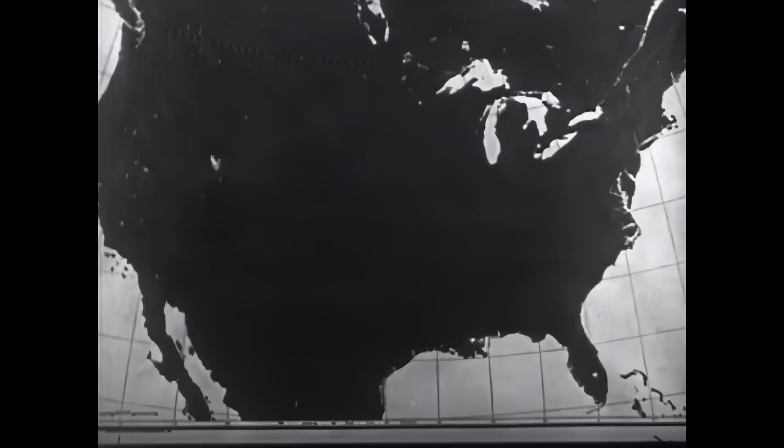Lockheed over North America: United Airlines, Continental Airlines Incorporated, Mid-Continent Airlines Incorporated, Northwest Airlines, Chicago and Southern Airlines, Braniff Airways Incorporated, National Airlines, Delta Airlines, Boston Maine Airways Incorporated, Trans-Canada Airlines, Pacific Alaska Airways. Lockheed over Central America: Líneas Aéreas Mineras, TACA, Compañía Nacional Cubana de Aviación. Lockheed over South America: Pan American Airways Incorporated.

KLM, Air France, Avianca, Línea Aeropostal Venezolana. Lockheed over Africa: Air France, Air Afrique, Aéro Maritime, South African Airways, DETA.

Lockheed over Europe: British Airways Limited, Aer Lingus Teoranta, KLM, LOT, Aeroput, LARES Romania, Air France. Lockheed over Asia: KLM, KNILM, Japan Air Transport Company Limited.

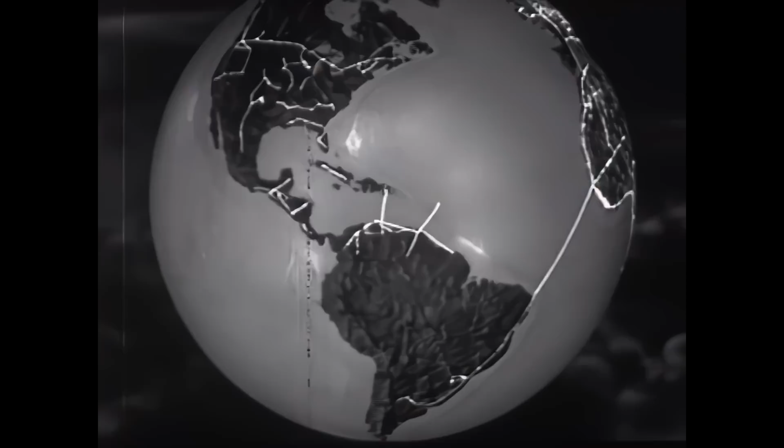Worldwide coverage, but it has not been accomplished in a day. It is the result of a smooth-running combination of men and machines. In that combination lies the story of Lockheed itself. It is a success story, modern, exciting, typically American.

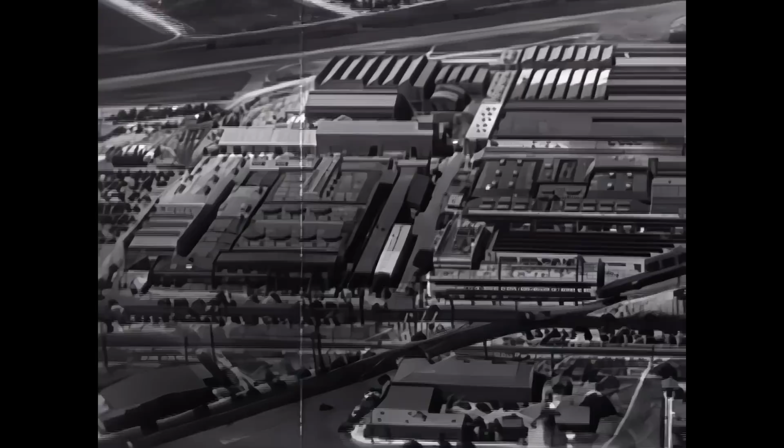The Lockheed Aircraft Corporation plant, Burbank, California, in 1926. And today, the same company, the same location, but quite definitely not the same plant.

As recently as 1932, sales aggregated the overwhelming total of $23,298.03. In 1940, actual deliveries amounted to more than $42 million, and conservative estimates indicate that in 1941 this figure will be more than doubled.

And to the men of Lockheed belongs a large share of the credit, to their skill and to their loyalty. They are a cross-section of typical American workmen: drillers, riveters, tool makers, die casters, machinists, and technicians.

In 1931, there were only 300 of them. In 1941, over 35,000. Every man who checks in, from office boy on up, has taken and passed exhaustive tests covering intelligence, temperament, and special aptitude to prove his individual ability.

35,000 American workmen, the right men for the right jobs to build the best planes. This is not a trick shot made with mirrors. It is the drafting room of the engineering department where every new Lockheed has its beginning.

A beginning conceived with the purpose of supplying the answer to definite needs of the aviation industry. To attain this goal, over 850 engineers make over 5,000 drawing plans, devoting a total of over 200,000 work hours to their mission of creating one new design.

The component parts of a modern airplane's wing, fuselage, and tail surface are almost countless in number, yet every single one of them must be engineered. Even the most minute part receives the greatest attention. Four separate drawings are made showing detail from four different angles. Although the part is no larger than a silver dollar, it will have to go a great deal further.

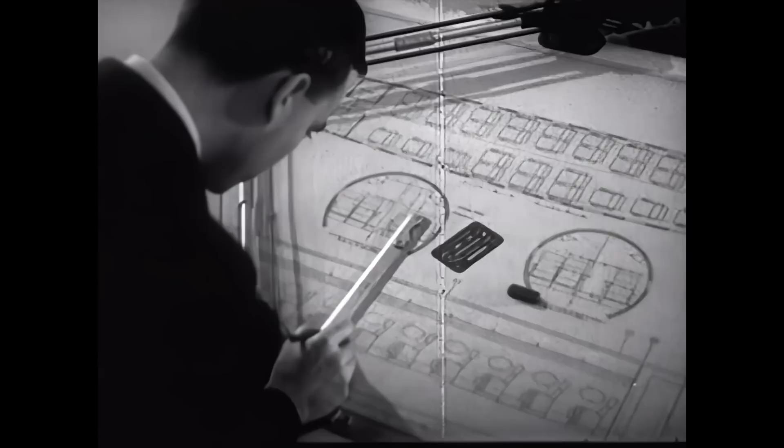The interior of a plane is one feature of design seldom associated in one's mind as coming under the supervision of the engineer. Yet one of his most important jobs is to provide utter comfort for passengers traveling through the air at high speeds. The Lodestar's cabin has been designed for this comfort.

Inside, the sound of powerful motors is reduced to a pleasant hum by scientific soundproofing and vibration control. Restful chairs, ample space, and headroom are results of thoughtful planning, and all Lockheeds are especially adaptable to the requirements of private owners. For businessmen to whom time means money, the Lodestar is convertible into a convenient and dependable office in the sky. The compact 12 becomes a comfortable lounge for attending important events anywhere at any time.

The cabin of Lockheed's new four-motor transport, the Excalibur, will look very much like this. Although the plane is still under construction, the engineers have built an exact replica, known as a mock-up, out of wood. In this way, every possible detail of passenger comfort can be effectively predetermined and applied.

But the ideas and plans that this man and the hundreds like him put into execution are not only those of Lockheed's chief engineers, but those of the entire flying world. For the Market Research Division maintains close contact with the operative branch of the industry. The staff compiles lists of important features relating to a plane's design.

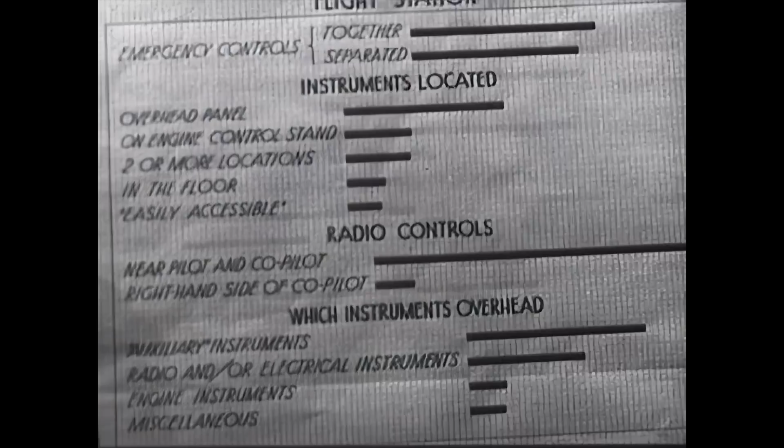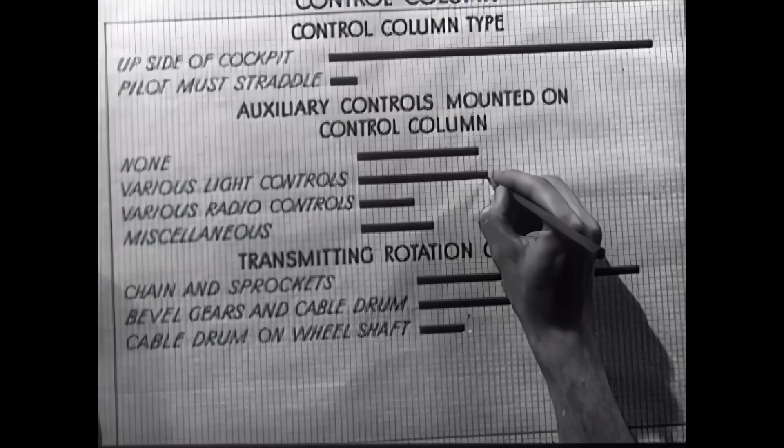Detailed graphs and charts are compiled by competent statisticians. No suggestion is too small. Every answer to every question is checked and noted. These findings are recorded in another pamphlet. You told us this is the way you would do it.

On flight station, on engine control stand, and on rudder pedals, we asked: are brake toe pedals desirable? 93% said yes, 7% no. That verdict is submitted by men whose combined opinions represent the experience of over 16 million hours of flying.

These practical viewpoints, as gathered by market research, are submitted to the engineers. They combine these ideas together with their own creative ability in the conception and building of every new Lockheed plane. That's how Lockheed designs airplanes to suit the men who know airplanes best: operators, pilots, and regular airline passengers.

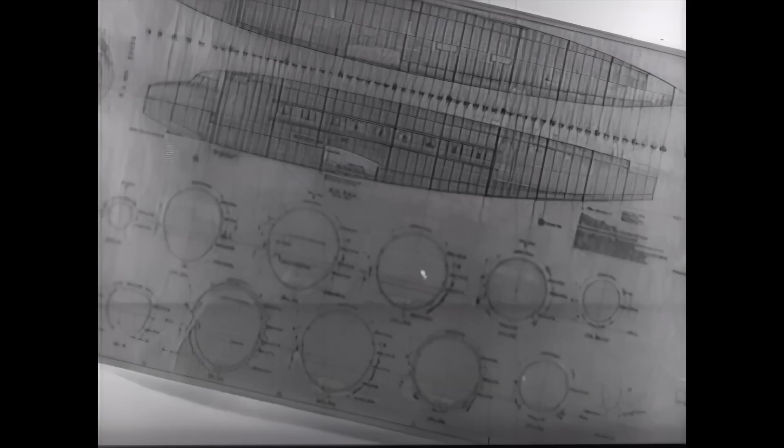And the first form a new plane takes is on paper. From these drawings, and thousands like them, an exact scale model known as a wind tunnel model is made and connected to instruments which determine its flight characteristics. The model is hand-carved, accurate to the fraction of an inch, weighs over 500 pounds, and costs more than $5,000 to build.

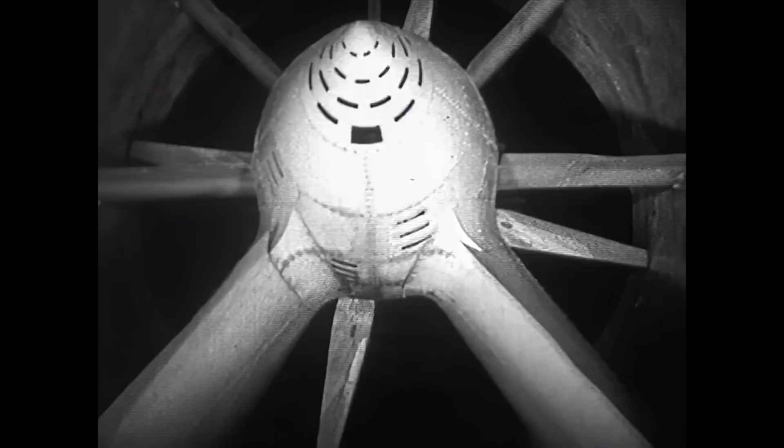The door is closed, the wind tunnel sealed. A flip of the switch and the wind propeller whips up to speed. The model is exposed to a far higher velocity than this 90-mile-an-hour wind. The small wind tunnel model is actually subjected to and withstands a much greater force.

From an idea to an actuality, from theory to fact, from a model to a completed Lockheed, the plane has been built. More than that, into it has been built the strength, ruggedness, and durability necessary for its safety and high-speed performance. But not so long ago, this shining plane was only a small part of a trainload of metal addressed to Lockheed.

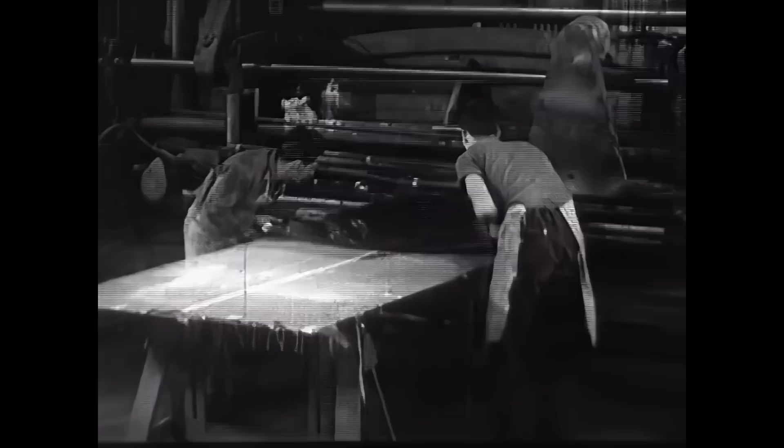For the metal inside these wooden frames is the stuff that planes are made of. Hard and strong, it must be fabricated by men and machines into the parts that make airliners. Giant shears act as huge mechanical scissors. Metal sheets are slipped into place. The sharp blade strikes and cuts through them as if they were cloth.

The high-frequency router, a dental patient's nightmare, turns 15,000 revolutions a minute and cuts layers of metal into their first rough shape. The bit turns so fast that it must be cooled by a constant stream of oil.

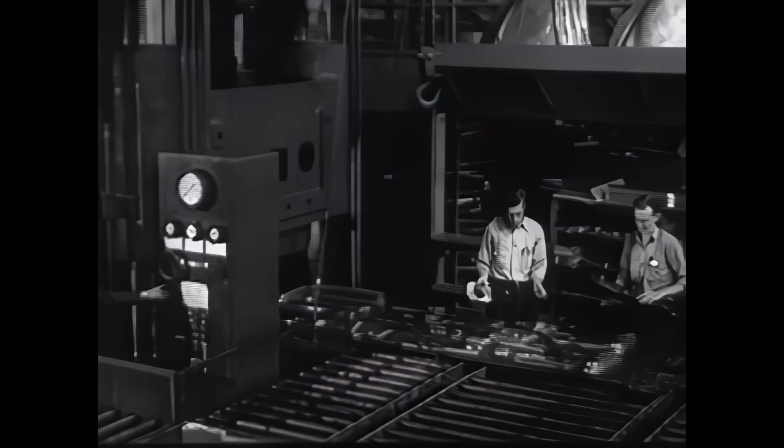The massive hydro press exerts an overall pressure of 9 million pounds, and it literally squeezes parts out of metal. An endless chain of roller conveyors carries a tray with the forms to workmen. They put the metal, which has already been cut to the correct size, in place on the forms. The tray now continues on its way into position under the press. The operator touches a switch, the press starts down, and look out below.

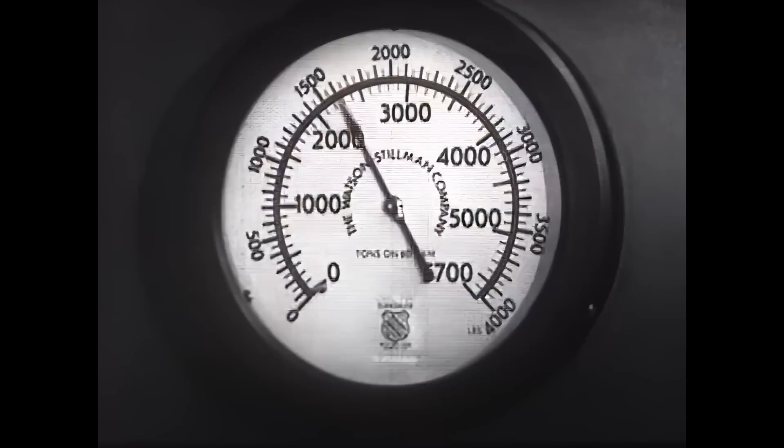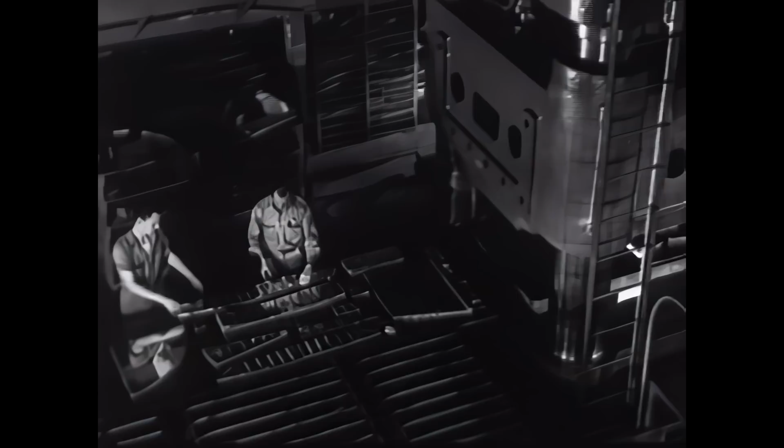Almost unbelievable pressure, an irresistible force, but under perfect control. And where plain sheet metal went in, finished parts come out. The hydro press turns out more parts in 1 minute than 2 men could complete in a whole day, and turns them out better and more accurately.

A compressed air stamp which forges metal is an excellent example of powerful machinery under absolute control. Taps as gentle as a tack hammer, then the crushing impact. What a nutcracker this outfit would make. And yet its control is so delicate that it can crack an egg, at least so the operator claims. Look out there, a little too hard and you'll have an awful mess. Be careful.

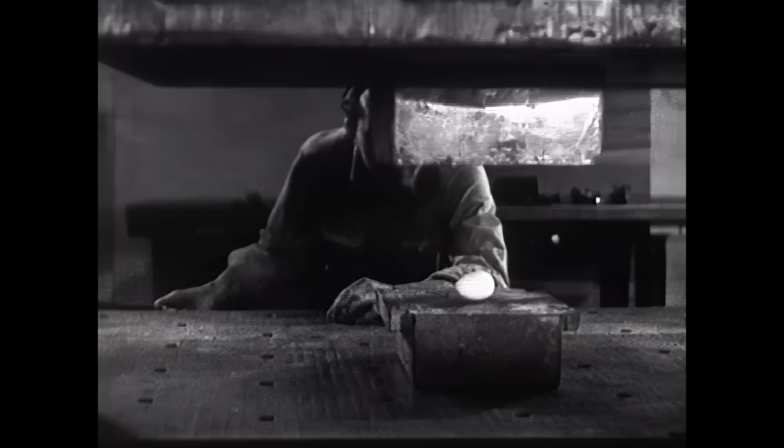Well, hello, stranger. You certainly have a brand new kind of a mama.

Skilled men and precision machines have fabricated these parts. But even metal can be strengthened and protected. To do this, there are several types of processing.

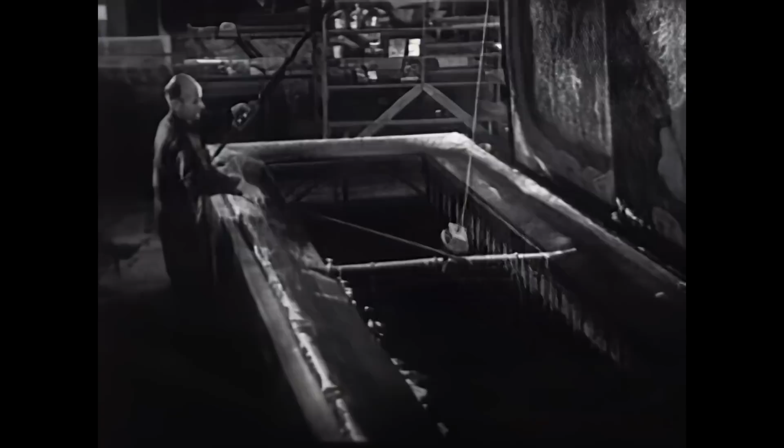Complete electrochemical anodizing baths provide parts with a protective coating of oxide film. This is a safeguard against the threat of corrosion caused by moisture. It is an interesting fact that these parts are protected against any harmful effects of moisture by being given a bath. Another type of bath is used for a different purpose.

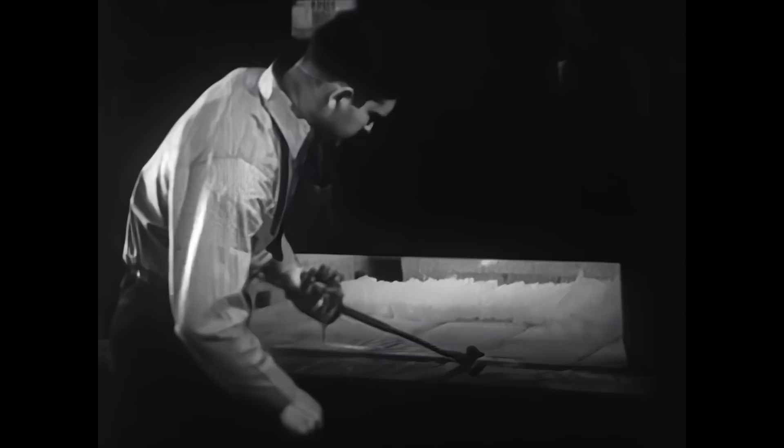In order to harden and thereby strengthen certain parts, they are immersed in a hot salt solution of sodium potassium nitrate. In large ovens, other parts are hardened by baking at 1550 degrees Fahrenheit and quenching them in oil.

It is easy enough to say that these parts, which will eventually be the plane, are strong. To prove that they are, to constantly guard the Lockheed measure of strength is the duty of the testing laboratory. A spectrograph is one of the most modern scientific testing devices. It analyzes the purity of the metal alloys which go into a plane.

Tremendous heat created by an arc burns sample filings of the metal. These filings are placed in a cavity on the lower of two acid-treated graphite electrodes and then burned. The light of the burning metal passes through a lens and then through a rotating sector, the adjustable opening of which controls the amount of light falling on the slit. The light then passes through the slit and falls upon a diffraction grating, a concave aluminized glass plate on which 24,000 lines per inch have been ruled with a diamond point. The light is separated by the grating into wavelengths, which fall upon a strip of film, producing a photographic record. Since each element has its own wavelength, the developed film reveals exactly which elements are present in the alloy. In this manner, the spectrograph immediately detects all impurities, and any inferior metal is promptly discarded.

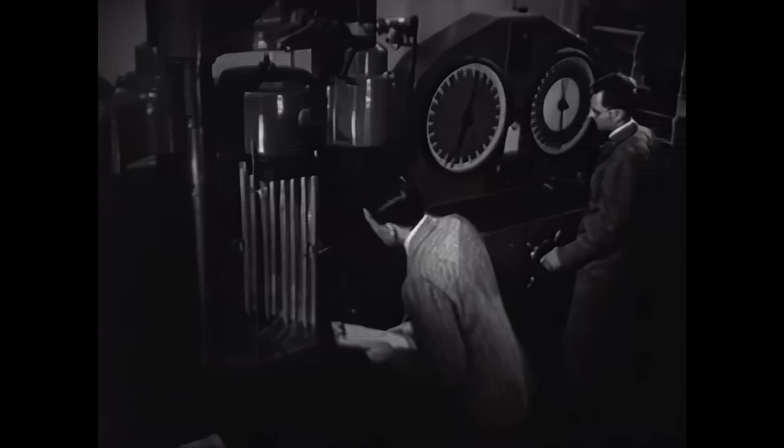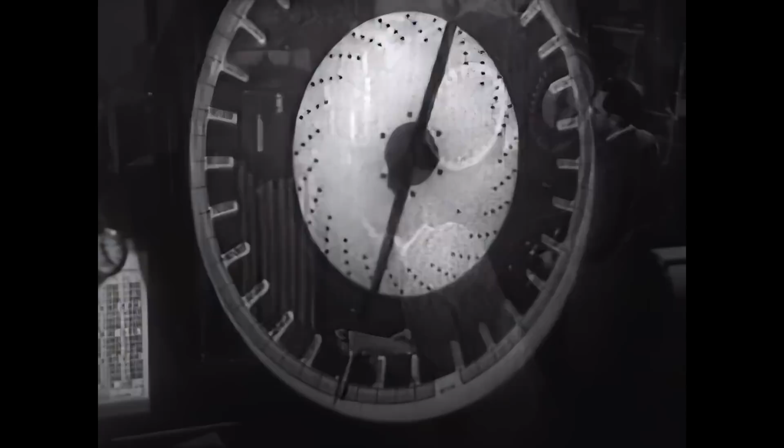The sole purpose of this huge machine is to break things. Its powerful jaws, capable of a compression of 300,000 pounds, are about to crush a small section of the wing in order to measure its resistance. Now watch carefully. The upper jaw is clamping down with an invisible, relentless force on the seemingly frail strip of metal. But actually, just how frail is it? 60,000 pounds? 70,000? There it is, a slight ripple. The breaking point has been reached, and it takes a pressure of over 80,000 pounds to even bend this frail little section of a wing.

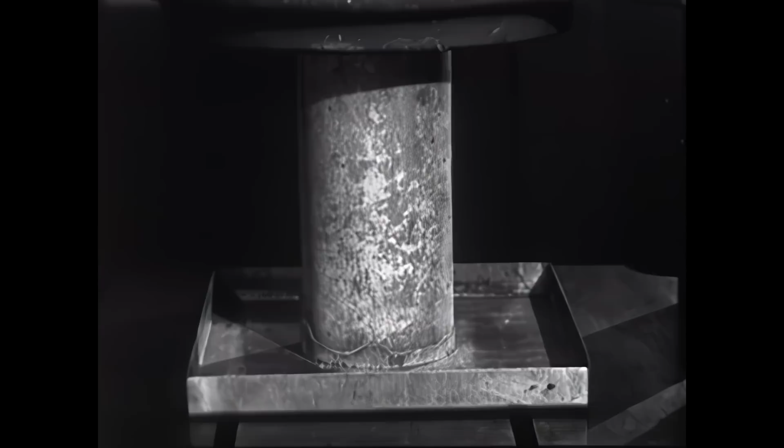For contrast, let's see what happens to a solid cylinder of concrete, which certainly appears much stronger. There's the first crack, and the concrete shatters completely under a pressure of less than 75,000 pounds.

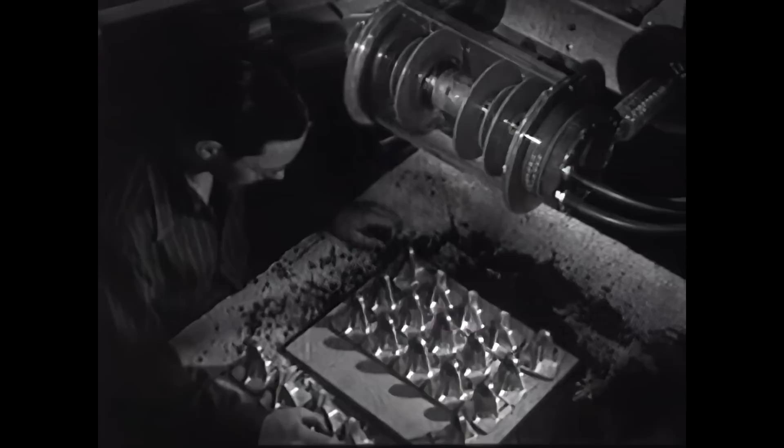All stressed parts, such as forgings and castings, are X-rayed for any possible flaws in the metal. Lockheed X-rays more parts than all other aircraft manufacturers combined. They may look new and shiny on the surface, but that doesn't matter - what are they like underneath? This batch is fine, perfect. A different story here - those slight, almost imperceptible flaws which doom it to the scrap heap would be invisible to any eye other than the X-ray. Therefore, although it is important to know what is on the outside of a plane, every stressed part is X-rayed because Lockheed thinks it is even more important to be absolutely positive of what is on the inside.

Yes, every part of this plane is built for the strength, ruggedness, and durability to achieve the highest speeds. And there goes the Lodestar. Carrying a full load of 17,500 pounds, it speeds down the runway for the takeoff. In 15 seconds, after a run of only 860 feet, it leaves the ground and soars into the air, climbing at a rate of 1,200 feet per minute.

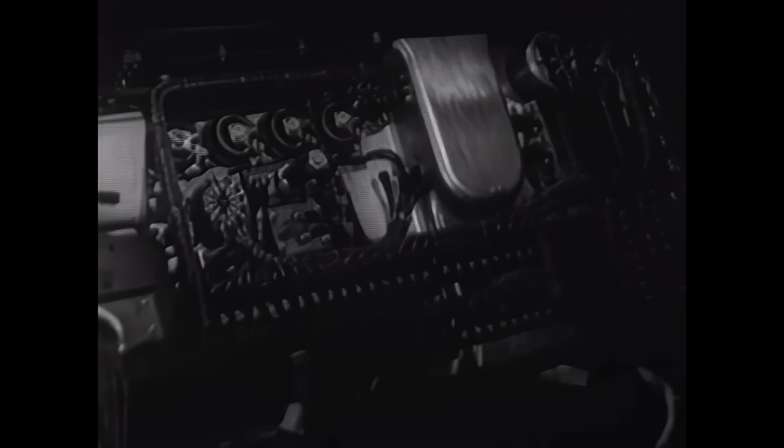While the plane is in flight, the dials and indicators on the panel are the guides by which a pilot flies. Over half a mile of wire connects them with the controlling instruments, which must be infinitely accurate before they are installed. In the instrument testing laboratory, each instrument and accessory is, to all intents and purposes, actually flown before being installed on the plane itself. For instance, on this stand, a motor duplicates the swing of a plane to test the turn and bank indicators. Here, tachometers are also tested, along with propeller governors, vacuum pumps, fuel pumps, starters, generators, and hydromatic motors for feathering propellers.

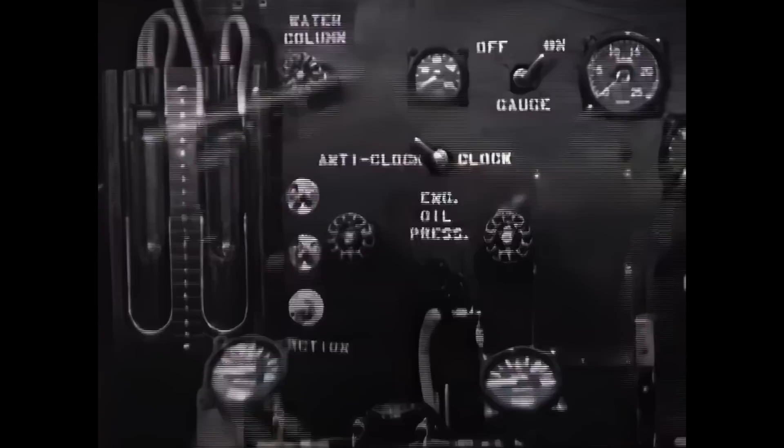The automatic pilot is checked by a vacuum system against mercury manometers. This small box can guide a plane in flight, keeping it as true to its course as the most experienced pilot.

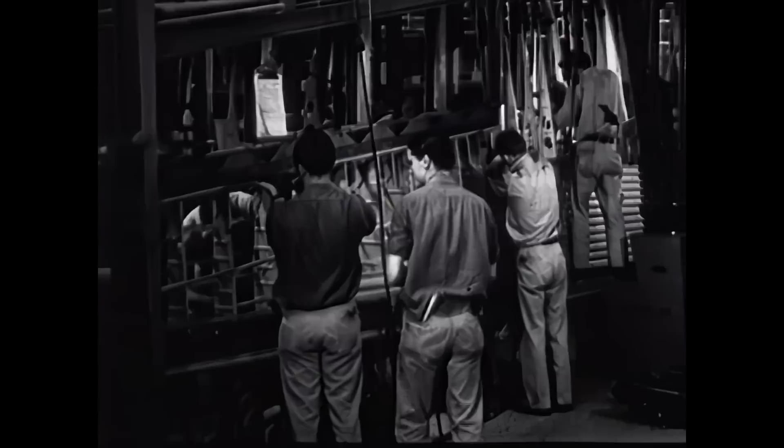An airplane is a chain of which the thousands of separate parts are the links. They must be forged together in order to shape the wing, the tail, and the fuselage. The duty of the wing is to provide the lift that sustains the flight of an airplane. Here in the plant, it must be assembled as flawlessly as it was designed. Although a wing is generally considered as a unit, it is really composed of three parts - two outer sections and the center section. We are all familiar with the general shape of a wing, but while an outer section is in the first stages of assembly, we can get a good idea of the complex structure on the inside.

Every rib and crosspiece has its purpose. Remember, it was just a small part of the wing that we saw withstand a compression of 80,000 pounds. Each operation is executed with precision and care as the outer section moves down the production line and takes shape. High-speed electric drills punch holes for the rivets. There are more than 700 drillers or riveters who have all had previous training. Even so, before they're assigned to actual production, they must attend Lockheed's own school until they can uphold the plant's standard of efficiency and skill.

There are more than 50,000 rivets on a completed wing, and every one of them is checked, examined, and checked again. This requires an army of over 200 inspectors. By the time a Lockheed plane is assembled, every square inch of it has been inspected at least 5 times. Inspector number 158 finds this row perfect and okays it.

The story of one outer wing section is the story of 10, of 20, of 1,000 sections as they move down the line in an endless parade. Mass production with the emphasis on precision and quality.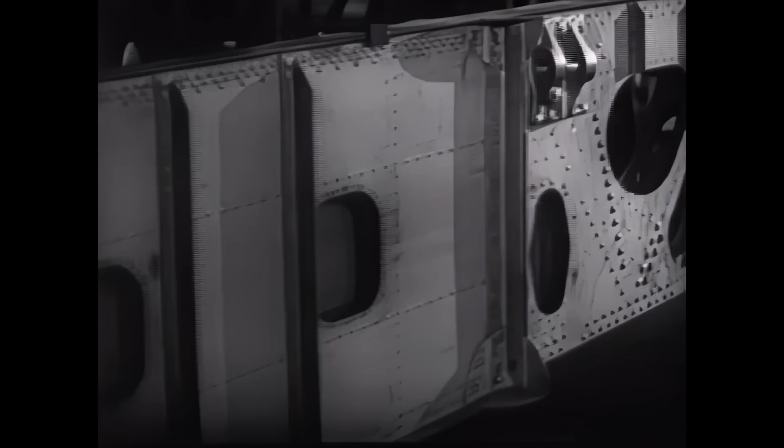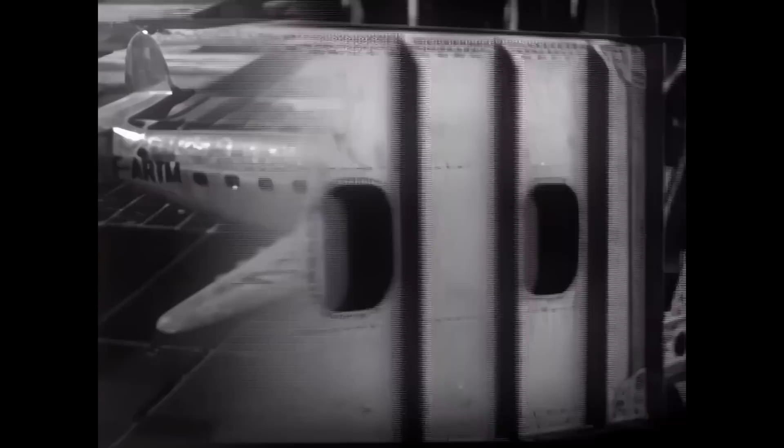The main beam is built just like a bridge. At all times, it carries all of the flying load, the engine load, and the landing load, and it is stressed to support more than 5 times the total weight of the fully loaded plane. Completed and assembled, capable of supporting a static load of 70,000 pounds, the wing will do its job as the men who built it have done theirs.

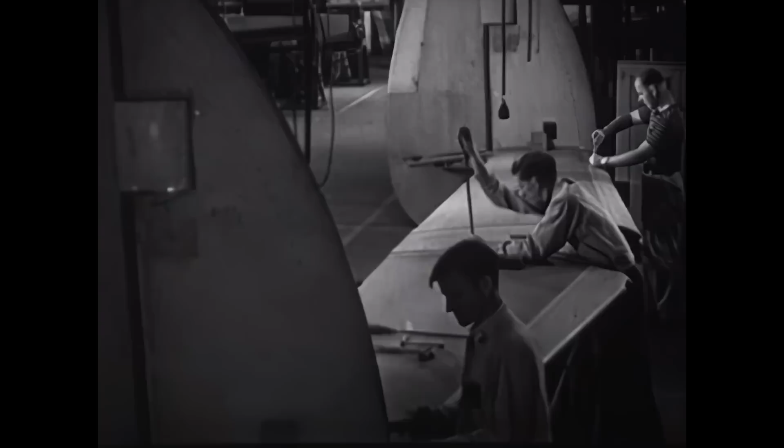The tail surfaces control the maneuverability of a plane. The use of twin rudders was developed by Lockheed and is one of the distinguishing features which point out every Lockheed. The fuselage is the body of the plane. It represents the final word in aerodynamic design and streamlining.

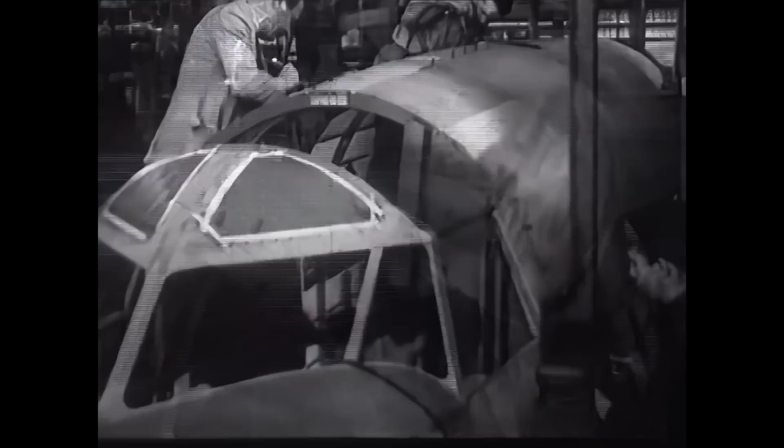During construction, these basic principles are built into the fuselage and applied to every operation from the beginning to the completed shell. As the first step in its assembly, the bulkheads are joined together by stringers, which form the basic shape and strength of the fuselage. Skin fitters then fit and shape the metal sheets, attaching them with removable fasteners. On their heels come the riveters, while every stage of the assembly is constantly under the close check of inspectors.

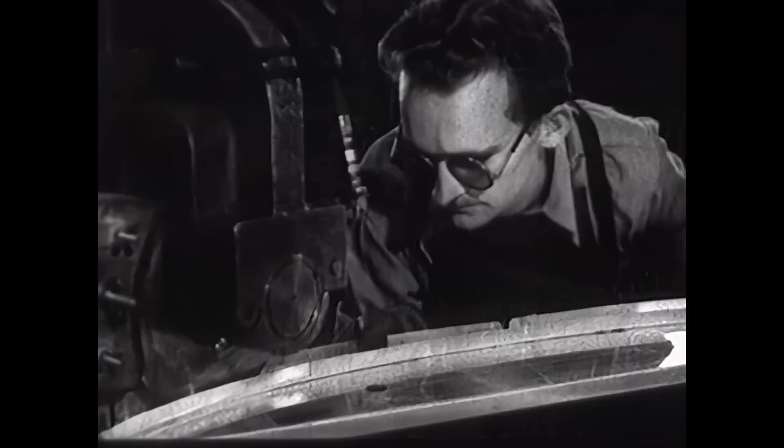Assembling with electric continuous spot welders facilitates production and gives many fuselage parts an extra smoothness for better streamlining. With an eye to the future, Lockheed is constantly enlarging on this process because better streamlining means greater speed. And so another fuselage is finished and ready for mating with the wing.

Like a ship being launched, it moves slowly down the ways. Slowly now, yes, but for just a little while longer. Soon sunlight will be glinting from its metal sides. Its nose will point upwind. In the comfort of its cabin, passengers will read or write or sleep or think after their own fashion, and beneath it, the lakes, rivers, and valleys of the countryside will unfold.

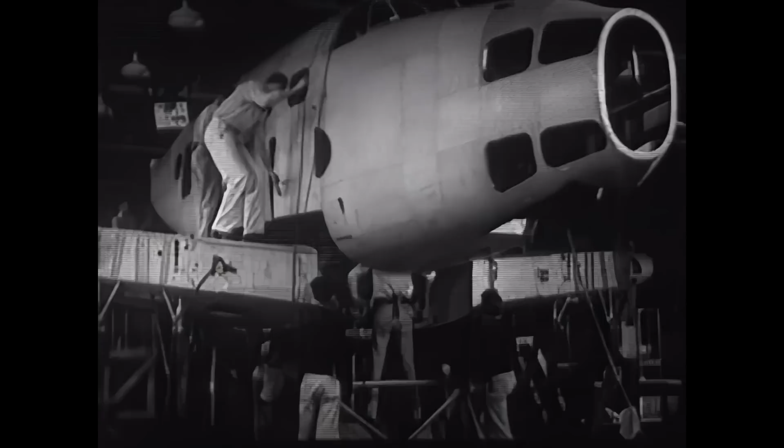Slowly still, the fuselage is lowered into place, united with the wing, and now, slow no longer. Speed on the water. Speed on the snow. Speed on wheels. On rails. Speed on wings.

There is truth in the slogan that it takes a Lockheed to beat a Lockheed. As the plane approaches the field, it slows down for the landing. The Fowler flap has been adopted and developed by Lockheed. The flap gives a greater lift to the wing and provides a brake action to reduce the speed. The plane lands at 65 miles an hour, and from a height of 50 feet, it can come to a complete stop in less than 600 yards.

This Lockheed Lodestar, with its safety, its comfort, and its great speed, typifies the ideals of aviation in America. To protect these ideals, Lockheed is contributing its share toward national defense and the defense of democracy in other parts of the world. These 414 bombers, better known as the Lockheed Hudson bombers, are rolling off the production line at an ever-increasing rate. They have been ordered in great quantities by Great Britain and Australia.

When ready for delivery by boat, the Hudson bombers are dismantled. The sleek fuselages are carefully encased in canvas, and the wings, already stowed away below deck, are crated in wooden frames for safe shipment. When the planes reach their destination, they are easily reassembled and soon ready to take their places in the staunch defense of the British Empire.

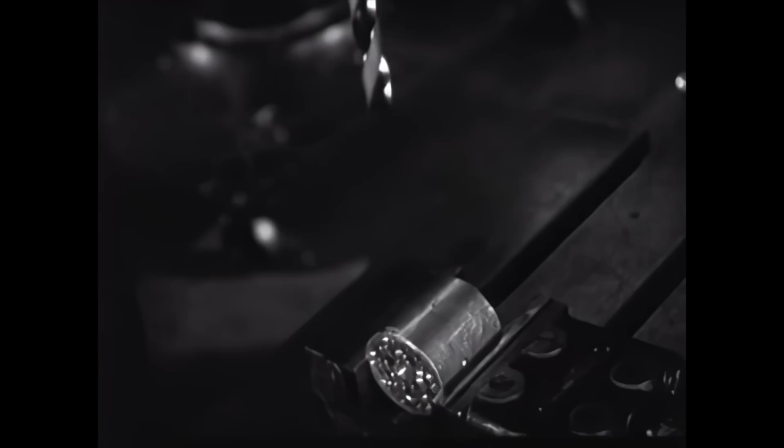And out of the vast production line come Lockheed's, the 212, the Electra, the 12, the Hudson bomber, the Lodestar, and now Lockheed's answer to the challenge of our times, the Interceptor Pursuit P-38. It has been developed solely for national defense, and Army officials consider it the fastest military plane in the world today. The P-38, a man-made comet.

The P-38 is a completely new development in conception and design. The purpose of this deadly single-seater fighter is to prevent any would-be attacker from reaching his objective. Lockheed is building vast quantities for the United States Army, and many of its features are closely guarded military secrets. But it can be revealed that the P-38 will climb a mile in a minute, and its motors are so quiet that it can approach any target almost without warning.

And as wings soar higher above America, so are soaring the hopes of free men the world over. For they know that whether it be for commerce or defense, ship for ship, American planes have no equal. And just as Lockheed commercial transports serve the people, so do the Lockheed military planes stand ready to serve should the need arise. The striking power of Hudson bombers, the speed of the P-38,

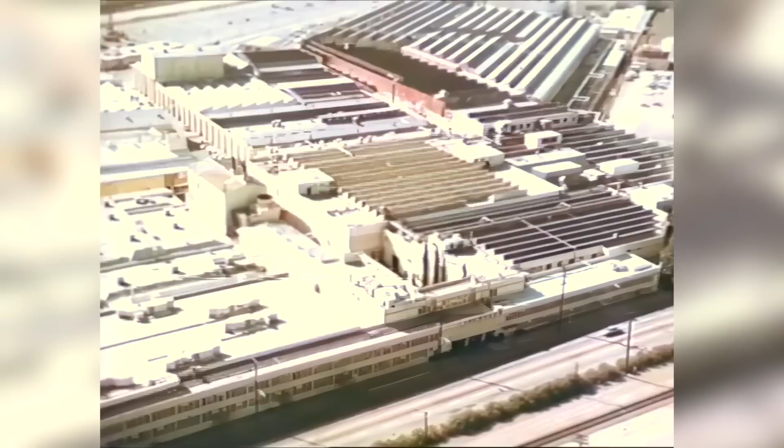In the late 1980s, the management of Lockheed Corporation reached a decision to vacate the huge factory complex at Burbank, where aircraft had been built for over 60 years. The time had come to move the aircraft work to more modern facilities elsewhere. By 1990, people and equipment were gone from many obsolete buildings that had covered more than 300 acres.

These included the structures where, in 1928, Allan Lockheed and a small group of employees began making wooden airplanes in buildings once occupied by makers of china and glassware. It was on this site, 4 years later, that the current Lockheed Corporation was born.

Lockheed's announcement that most of the buildings would soon be torn down stirred memories among many who had known the company in its early years. One of them was Harvey Christen, who had joined the company soon after it moved to Burbank from Hollywood. As a teenage student from Pasadena, Christen took a temporary job at Lockheed in 1928 and stayed on for nearly half a century until his retirement in 1974. Working in many branches of the company, Christen was an eyewitness to events that took the firm from a fledgling in Burbank to a giant of the aerospace industry.

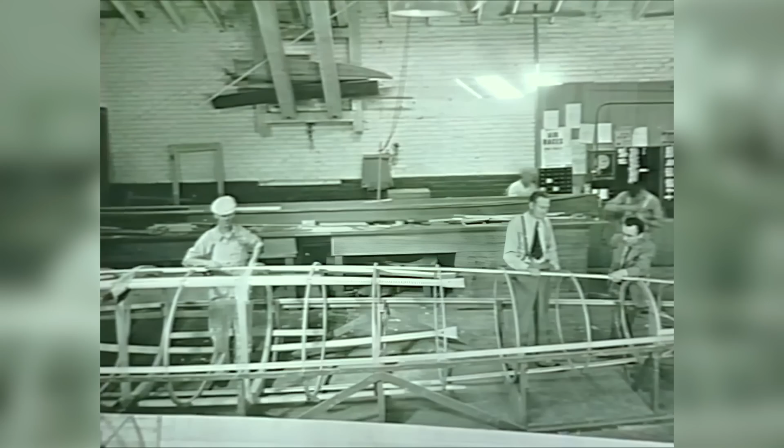This is where it all began, our first day at work at Lockheed. To my rear was San Fernando Road and Empire Avenue. To my right, the Mission Glass Company. To the left, the China factory. Behind this venerable brick wall, the China Company had become a very important part of the Lockheed complex, utilized for fabrication and subassembly. When Christen joined Lockheed Aircraft Company, it had only 80 employees, some working in this building that had belonged to the Empire China Company.

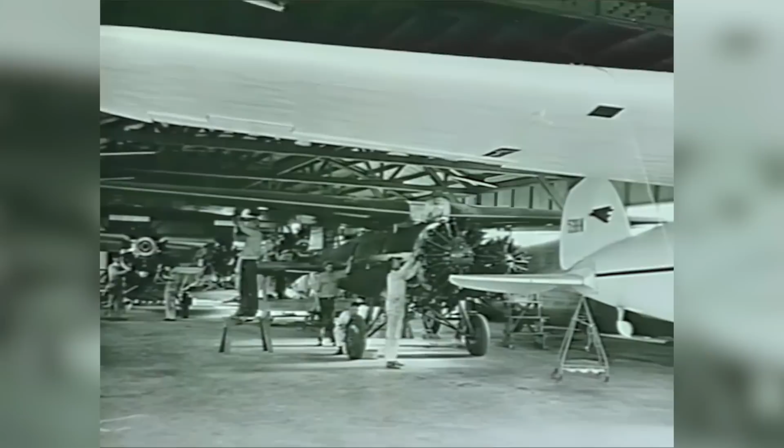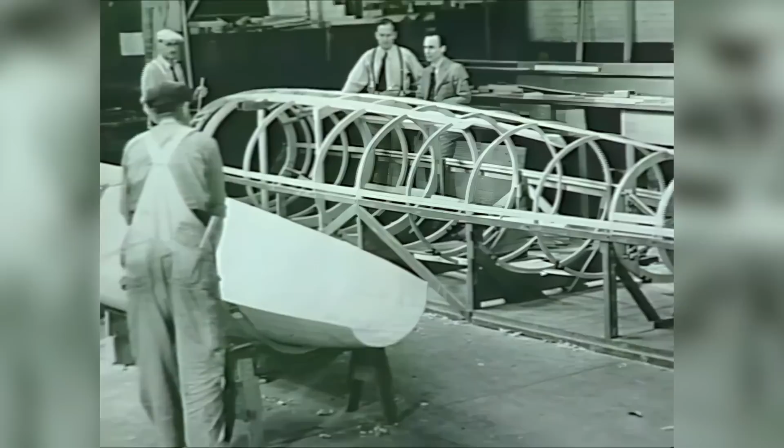They were building the Vega wing monoplanes made of Sitka spruce, and almost in its entirety. Well, since the fuselage, the empennage, the wing, everything but the landing gear and the power plant were made of Sitka spruce, we used principally highly qualified cabinet makers. These men were extremely proficient in following layout drawings, engineering drawings precisely. They made temporary tooling of wood to make ribs, to form ribs, to form the airfoil of the wing. They had a mold that made the diaphragms, the bulkheads, which, by the way, were made of almost 20 to 30 laminations of Sitka spruce.

And I must add that at this point, and this is important, a piece of Sitka spruce, 1/4 by 3/4 by 24 inches long, 8 annual growth rings to the inch, free of all rosin or leaks, could hold 24,000 psi, laminated into a bulkhead. It pulled 120,000 psi, which is the equivalent of some pretty high-grade chromolybdenum steel. Didn't know that at the time, but we found out later that spruce airplane had the qualities and the strengths of many, many metals, but had the flexibility of a spruce tree.

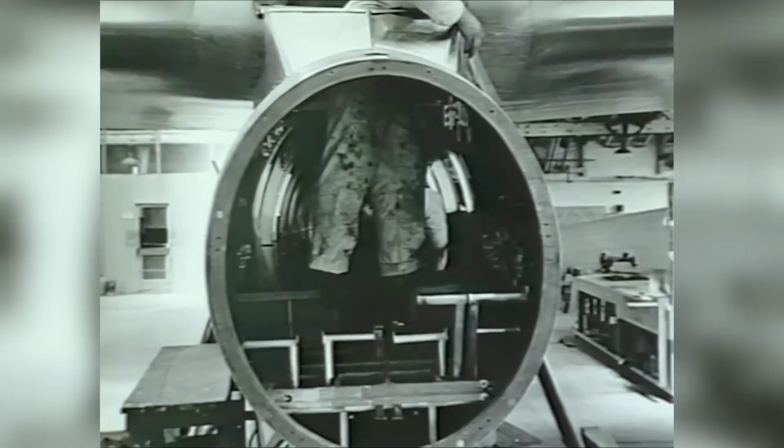Leading the small group of airplane builders was a man whose name would become famous in the industry, Allan Lockheed. Allan and his brothers, Malcolm and Victor, were in on the original group with their chief designer, the well-known Jack Northrop, who was the outstanding creator of the monocoque fuselage and the type of airplane that the Lockheed Vega and other models turned out to be.

A man named Tony Stadlman, who came from Czechoslovakia by way of the Middle West, turned out to be the factory man, the builder, the man who could take all of Northrop's designs and create them into an airplane. These men were the principals of the Lockheed Company that came to Burbank.

Production of the Vega and other wooden aircraft at Burbank was threatened in 1929 when the American economy went into a tailspin, and the Lockheed Company was struggling to maintain its workforce and its capacity, which was minimal. Allan Lockheed was approached by a group from Detroit who formed Detroit Aircraft, who had hoped someday to become the General Motors of the Air.

Lockheed was one of their acquisitions, along with Ryan Aircraft, Parks Air College, Evans Pump Company, and others. But they no more than established themselves as the new owners of Detroit Aircraft, bringing their executives to our company, when along came a very difficult time known as the Depression, the Great Depression. So Detroit Aircraft found themselves overextended financially, and they went into bankruptcy.

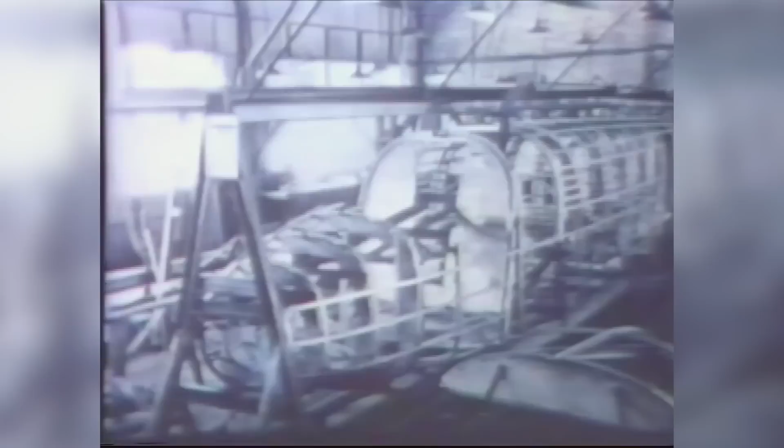By 1934, the company had made the management decision to proceed with this new Electra Model 10. It was built and assembled primarily in the hangars that were left here by the old original Lockheed Detroit Aircraft Company. Final assembly, if you please, was outside of the hangars, because the hangars were not big enough to take on the wings of the airplane and the assembly. From there, they proceeded to our own little flight line along this railroad strip, not yet anything but a dirt runway. And from there, the initial Electra flew and was tested and accepted by our then chief test pilot, Marshall Headle, and a pilot on loan from the Boeing Company.

The reports on this new twin-engine all-metal version of the Lockheed airplane began to come back from Michigan, recommending the abandonment of the single fin and rudder and the adding of the double tail, the twin fins and rudders, for directional stability and single-engine performance. That was accepted on the spot, and as a result of that decision, that became the hallmark of the Model 10 Electra, this double tail. It was recommended by none other than Clarence L. Johnson, who very shortly became the chief aerodynamicist of our present company.

During the 1930s, some very interesting and famous pilots came by to evaluate our Electra because of its very high performance characteristics, and especially its single engine performance and its long range.

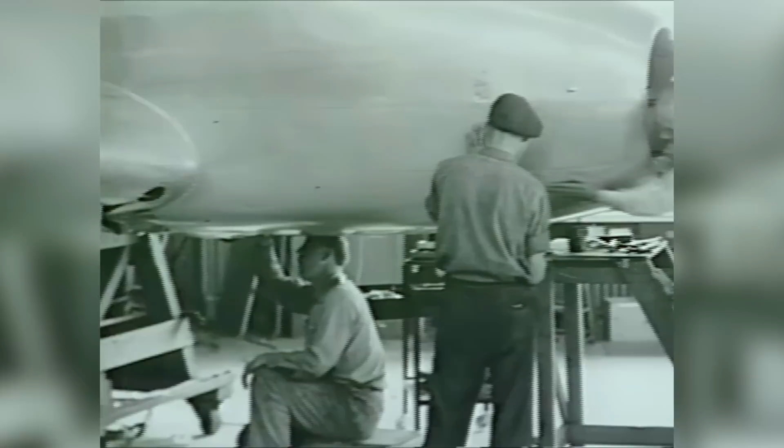Later on, in years to come, we had another great experience with Amelia when she came out to personally become involved, just as she did on the Vega, with her Model 10E Electra, which was very specially built for her because she was going to carry approximately 1,100 gallons of fuel and have special navigation equipment. In the process of building her airplane, once again she put on coveralls and became especially involved in what we called our QEC, our power plant installations.

I can recall her help plumbing the engine installation, because she wanted to know firsthand how and where the fuel and the electrical power came from in the airplane, knowing full well that with two engines, she'd need them both for the heavy load takeoff she was about to make on the round-the-world flight. Once again, Amelia became part of our crew, part of us, in the process of building an airplane. Another demonstration of a great pioneer and a wonderful lady.

Then there was Charles Lindbergh and his wife Anne, who frequented our place daily almost during the process of building their Sirius. We built it as a fixed gear land plane, knowing in the final analysis that he was going to do a route survey of the Pacific for Pan American. That Sirius that he and Anne Lindbergh acquired was very special because we put a canopy on, we put things on to protect them from the elements, because Anne became his navigator and his radio operator. Just think of it.

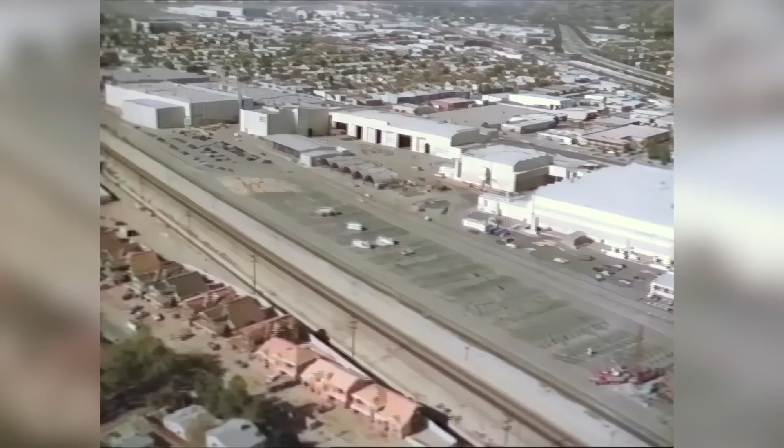This is the site of the original 2,000-foot dirt runway, gopher holes and all. It's from this very runway that the famous Winnie Mae of Wiley Post, Amelia Earhart's Little Red Vega, Sir Charles Kingsford Smith's Altair, and Lindbergh's Sirius all flew.

In the late '30s, war broke out in Europe. The British had an urgent need for new aircraft, and Lockheed offered to build a new bomber. During that period, we had expanded the design of the Electra into what we called the Model 14, an enlarged semi-mid-wing version of a twin-engine, two-tailed airplane.

At that time, the British were interested in getting support in the form of a patrol airplane to protect the coast of all the British Isles. They came to the United States and reviewed the designs of our aircraft and our competitors'. They chose the Model 14, which we, in a 24-hour period under Kelly Johnson's supervision, converted into a mock-up of a Hudson bomber. This is a very important area of the original Lockheed as we know it today.

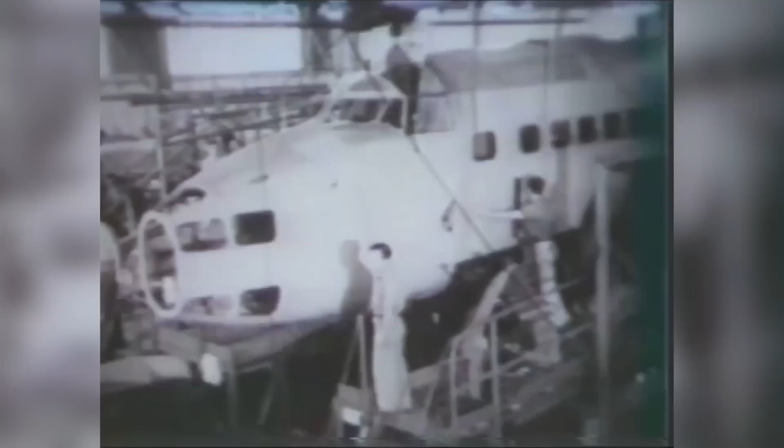When we received that order, we immediately established a procurement program second to none, with organizations such as the Aluminum Company of America and the engine manufacturers, because 200 Hudson bombers in one initial order had never come to any company before in that quantity, on a schedule so uniquely developed to meet British requirements. The next question became: where are we going to build all these airplanes?

The company could only expand in one direction, because Burbank was on the east and that was it. So westward we came. We closed off a street called Lincoln Avenue and moved all the way up to Buena Vista, an offshoot of San Fernando Road, and Turkey Crossing, where the little plant first started.

As production accelerated and we began accumulating airplanes in our test area—by the way, our test strip was the old dirt runway at B1—we did not have a paved runway, no lights, no traffic control. We were the traffic control, by way of the pilot house, as we called it, right at the edge of that little runway at Burbank. That's where the Hudson started its first testing and its first flying.

During the midpoint, as we became well established on our Hudson line, along came a design competition that Kelly Johnson entered for Lockheed. It turned out to become the Lightning, the twin-tailed P-38. So what we did was divide the assembly line into a Hudson line and a P-38 line, starting the P-38 line down through the same overall assembly building, paralleling the Hudson bomber.

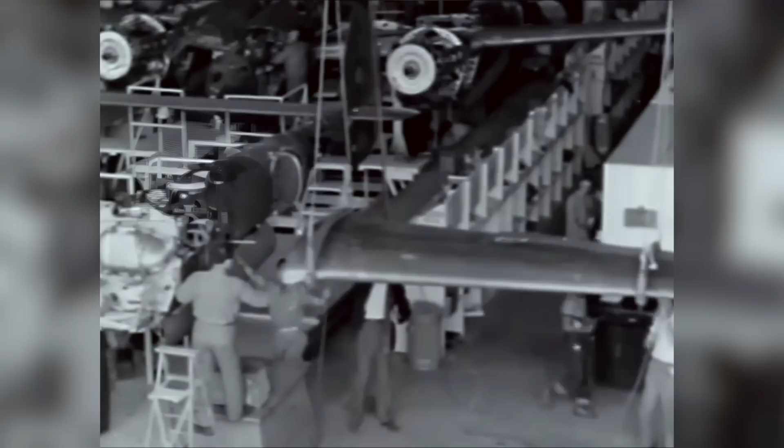The rate of the P-38 was slow and accelerating initially, but we got it up to where many P-38s a day came off that line, even a faster production schedule than the Hudson. The P-38 program probably accelerated faster than any line in the area.

We got to a point where we were able to roll out a P-38 in an hour, but we had control over the condition of those airplanes to the extent that you could pick any airplane and decide what the status was, and bring it up to flight status immediately upon receipt of whatever requirements were missing in the assembly line. We had absolute control.

The result was very few run-up failures or test flight failures. We had quality control through pride of workmanship and a group of people who knew by experience on the Hudson line how to handle the accelerated program on the P-38. So the Hudson program became a very valuable program for developing our skills to take on a dual assembly line.

The Hudson and the P-38 required no end of additional skills in piloting our airplanes, and we brought in some very famous people who maybe at the time were not, but became so important to the Air Force and to ourselves. To name but a few: Milo Burcham, who had flown with a group in a Boeing P-12 at air shows.

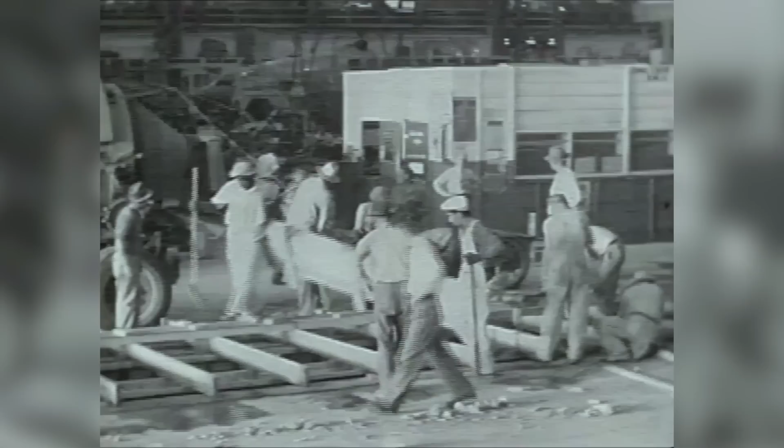The Vega Company built the facility around the assembly lines as they developed, and the fabrication shops expanded as the airplanes were being built and assembled—literally built the buildings over the workforce. This excellent facility of its day, built on the southeast corner of the airport, was to become the home of the Vega Company, a wholly owned subsidiary of Lockheed.

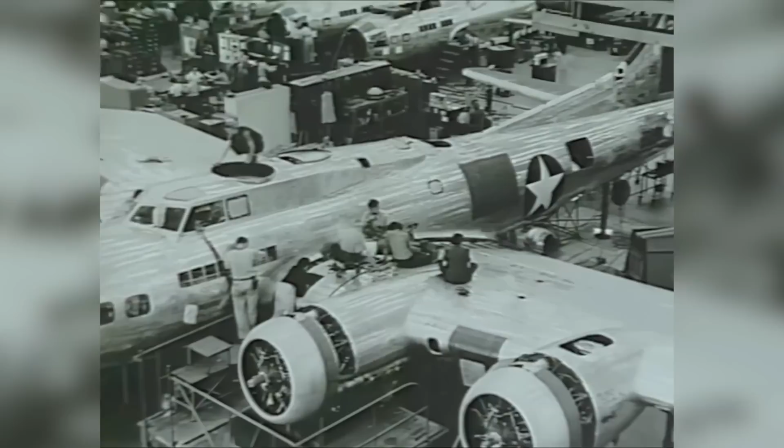One of the unique things about the Vega Company was that when the Boeing Company had a challenge that would come from the Air Force to modify a B-17, the request would go out to the two subsidiaries.

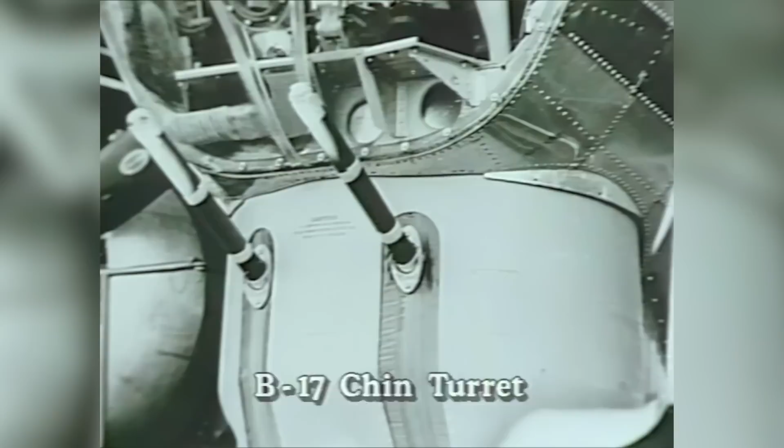The first chin turret to protect the gunner in the nose of the airplane and the crew was a Vega installation. I remember well going to the Long Beach staging area where we took our P-38s and Hudsons that were flown into the Pacific Theater, the Hudsons to Australia, the P-38s into General Kenney's task force. When a B-17 showed up at Long Beach with a chin turret on, you'd watch the ferry command come out and walk up and down that line. When they saw a chin turret on the airplane, that was their baby, because not one had to be ditched in the drink.

The Vega B-17 line, as we knew it, was built in the facilities adjacent to Hollywood Way, literally in a facility that wrapped itself around the then Lockheed Air Terminal. They successfully produced well over 2,000 B-17s on schedule to the latest Air Force requirements, with a quality standard that made them second to none.

You know, about that time, Pearl Harbor, the scare of the submarine off of Goleta, there was a scare that came across the entire West Coast. Shipbuilders, airplane builders, anybody vital to the defense program had to have the ultimate protection.

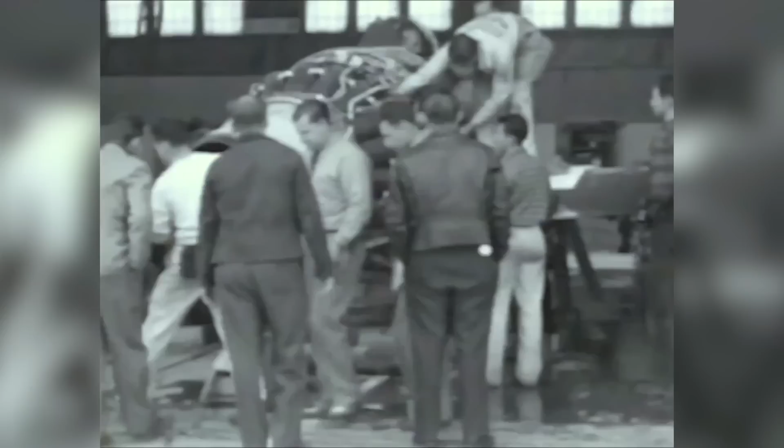Right in the middle of this intense production program, our great Kelly came up with another dream. Suddenly there became available in England an engine designed by a Mr. Whittle, called the Whittle turbine. While that was going on, Kelly had already designed on paper how he was going to apply that little engine and its thrust to an airplane.

We who were building the production airplanes became aware of a drawing that would come out for a forging and a part that had a peculiar name, like McCormick Deering Tractor, with no relationship to an airplane, to keep the design secretive. When that went out to a forging company or whoever made that component, they were put in a position of not needing to know. That was the key. Unless you had a need to know, you didn't ask questions, you didn't become involved.

So Kelly built Lulabelle in a record 143 days, towed it up to what was then Muroc Dry Lake, now Edwards Air Force Base. And again, here comes that wonderful guy, Milo Burcham, who was elected to make the first flight in Lulabelle. Lulabelle was very successful. Milo said it maneuvers well, it's fast, and it gives you a feeling of confidence.

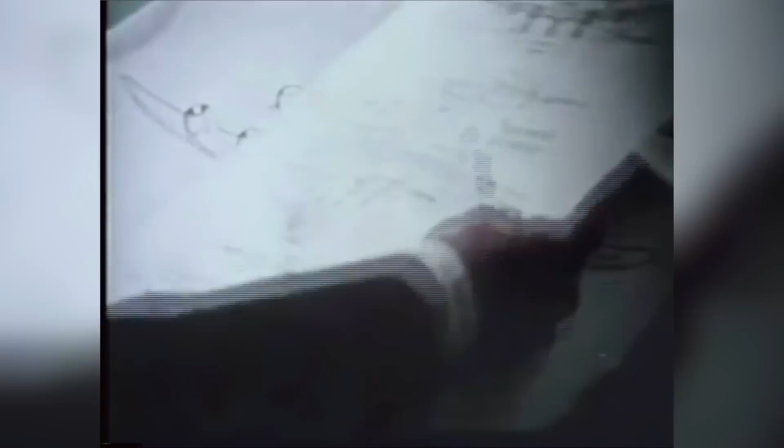Just before World War II, Lockheed had designed a large new transport. It was given a name that would become widely known. The name Constellation became a famous name in our company, and we always named our airplanes after stars or constellations of stars. The Sirius was a star, the Vega was a star, the Altair was a star, and along comes the need for a bright and shiny new airplane that had the benefit of all those that had gone before, and it became a Constellation. Its nickname was the Connie.

It was one of those unique experiences where a customer, naturally, in those days had to be found for their first group. The customer turned out to be TWA, owned by none other than, at that time, our friend Howard Hughes. So as Kelly Johnson and his design staff and Robert and Courtlandt Gross and Howard Hughes would meet, they would draw and submit ideas of what the configuration should look like.

One interesting experience, and this is a factual experience: the first design that came up was a typical, very straightforward cigar-shaped fuselage. It had a multiple tail, but it didn't look like what the Connie turned out to be. Mr. Gross looked at that airplane, as did Howard and the rest, and it was a very efficient-looking, straightforward design. Every section of that fuselage is identical. It was ideal for production. But Mr. Gross says that airplane doesn't look like it really wants to fly freely.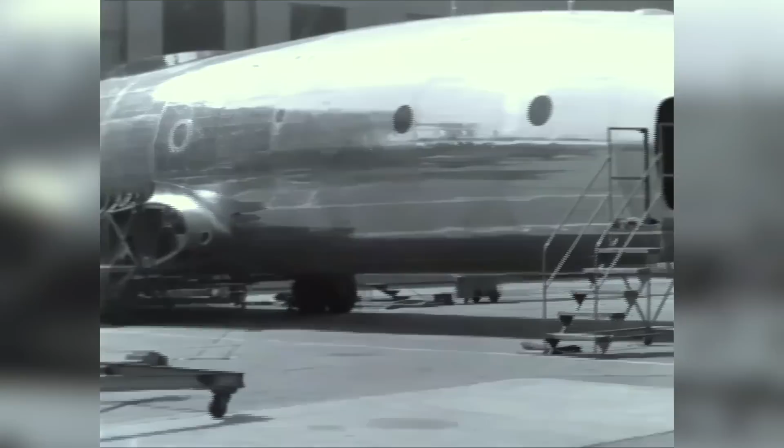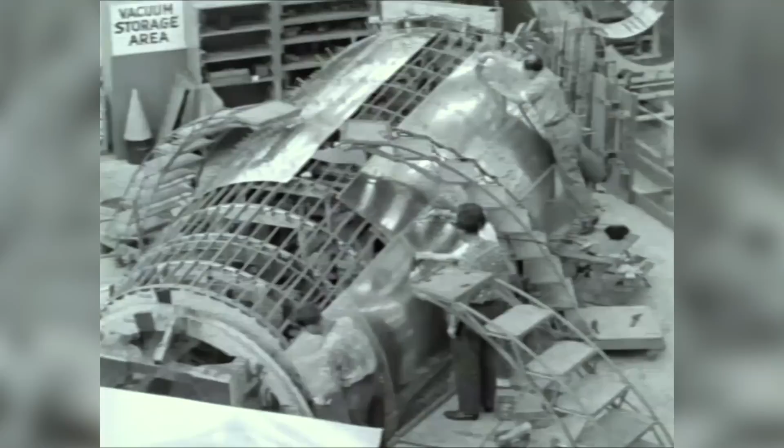Why don't we do this? He walked up to the blackboard and he drew a couple lines that looked like a side view of a dolphin. Kelly looked at that and Hall looked at that, and they said, wow, if we do that, technically the fuselage becomes an airfoil because your shape is like the wing rib of an airplane wing. So all of a sudden, right then and there, in spite of the need for standardized production, we had a multiple shape design that, of course, made new bulkheads at every station and made it a little complex initially. But oh, how it contributed to the reputation of that airplane.

The first Constellations came off the Burbank assembly lines during World War II and served as military transports. At war's end, commercial airlines would begin ordering Constellations. Eventually, they would be in passenger service around the world.

To see it in the air was to see the most graceful airplane. That Connie became the flagship of Pan American, Eastern Airlines, Chicago and Southern that became Delta, and many airlines in the European theater. Even Qantas Airlines down in the South Pacific, they put drop tanks, tip tanks on the wing, extended the range and made it look almost like a version of a military airplane, but it still had the grace of a Connie. That airplane was, in a commercial sense, the airplane that took us into the next and the next and the next generation of Lockheed airplanes.

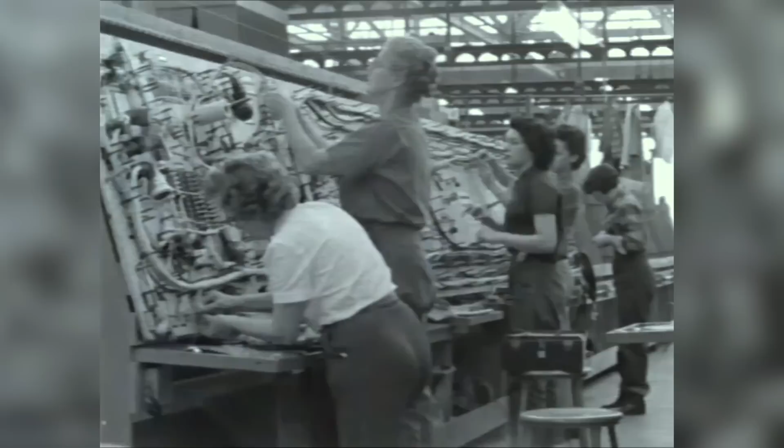Many women joined the wartime workforce. Yes, oh, the women came into Lockheed. They reached a peak of almost 40% of our production workforce. They particularly adapted well to precision work. Their fingers were more nimble. We were all thumbs. They could put an instrument panel together. They could assemble wiring bundles to install as a unit into the airplanes. They could assemble hydraulic units very precisely.

They adapted so beautifully, and we brought that term out at the Vega company called Rosie the Riveter. But believe it or not, Rosie the Riveter was a symbol, but the riveting was one of many, many skills that they brought to our company.

During the war, the company's Burbank facilities had expanded to cover several hundred acres. Factory buildings spread for half a mile east and west of the old China Company quarters at Empire Avenue and San Fernando Road.

A mile to the west, another factory complex had been created for B-17 and Constellation production. By 1945, the Burbank factories had built almost 19,000 combat aircraft for America and her allies.

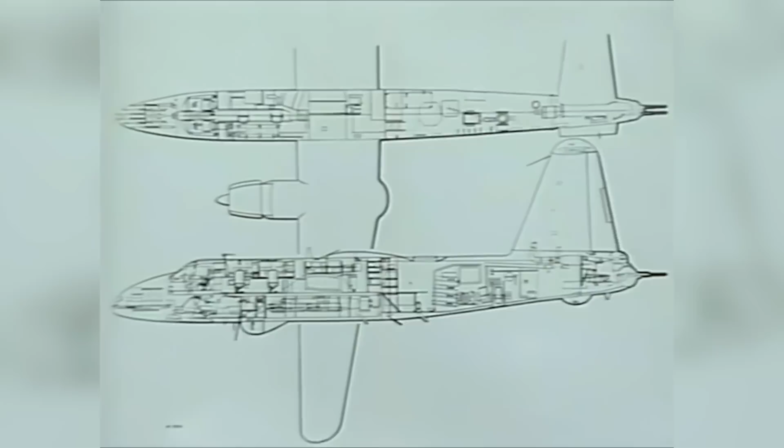They wanted it to be compact, not cumbersome, small by comparison. So they came up with the idea that it would be a two-engine airplane with a tremendous fuel capacity to stay on station and yet have the ability to carry the payload that was required. And it had to have some unique features never before installed.

For instance, it required a magnetometer that heretofore had been used in the oil industry to find and locate oil fields, which was a device attached to the airplane. It looked like a stinger.

And so the P2V Neptune was the second breath, you might say, of the beginning of the very successful career of the Vega Airplane Company and its contribution to the services.

And another version, Operation High Jump, South Pole Expedition. Suddenly, we got the request to develop a ski airplane. Well, it turned out that it wasn't just one. It was a sequence of ski airplanes, backup airplanes, where the Navy was going to go to the South Pole and do some exploratory work.

Another very important contribution that the P2V made to the Navy, to our services, and to our country was the fact that it demonstrated the ability to stay airborne for hours beyond any aircraft up to that point. To demonstrate that, a commander took an airplane designated the Truculent Turtle.

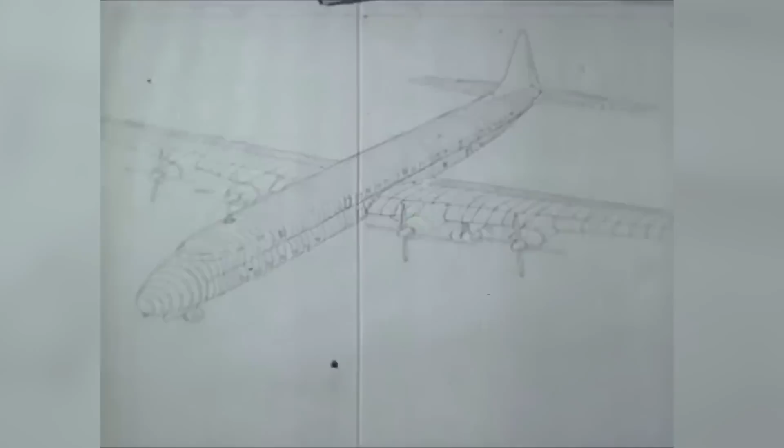Designed to take off at a maximum weight of 92 tons, the Constitution needed turbine engines. Because turbines were not yet available, the 2 prototypes began their test flying with piston engines of 3,000 horsepower each.

The mission was to transport Navy personnel and their equipment, as well as a senior officer in an airborne command post.

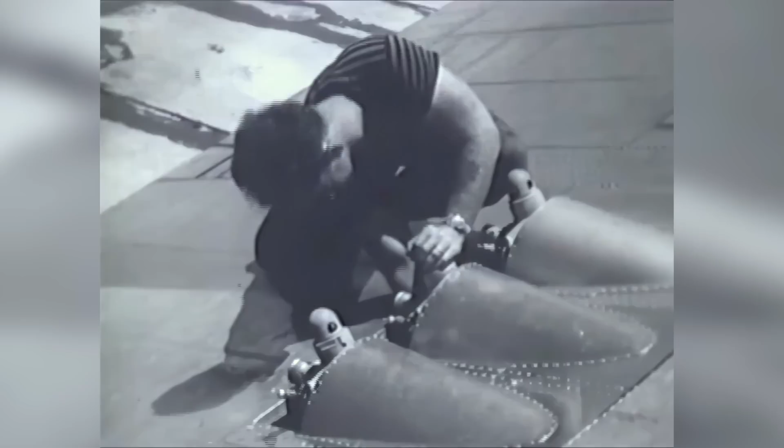We took the initial first airplane, serial number 1, to Patuxent River, and to the amazement of the Navy test pilots in the program down at Pax River, this airplane did things that no other airplane had ever done. And why? Because for the lack of the turbine engines, we installed JATO bottles integral to the wing. And we could take that airplane off the ground with the equivalent of 5 engines in power.

Each of those JATO bottles developed 1,000 pounds of thrust for 14 seconds. And when you put 16 JATO bottles, 8 on each side, 1,000 pounds each, suddenly you had 16,000 pounds of JATO thrust.

Lack of power kept the Constitution from full production, but the prototypes were forerunners of huge jet transports that would fly 20 years later.

By the mid-1950s, turboprop engines were available. Lockheed began producing a new commercial airliner, the L-188 Electra, using Allison T-56 engines.

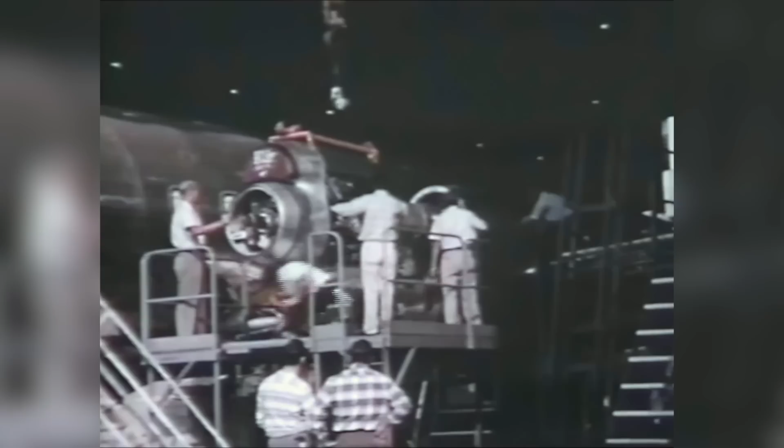It was a unique engine because it was a turboprop with a gearbox, but it had 2 speeds. It had a ground idle and a cruise. So our L-188, known as the Electra, and our C-130, known as Hercules, the Hercules being developed in the Skunk Works, almost parallel to the Electra, being developed in our production line. Of course, also demonstrated through our flight engineering group, which was closely tied to our Skunk Works operation because we were using the same power plants. We come up with this unique development where we could give to the airline commercially an airplane that could get in and out of facilities that no other, even reciprocating engine, in some instances, could handle, because of its unique ability to use maximum power with a constant speed engine.

So the L-188 became a forerunner of the pure jet airplane, and airlines like American and Eastern flew that airplane and got maximum performance out of it.

The arrival of the pure jets brought an end to Electra production after only 170 sales. But the basic design would soon lead to a new naval patrol aircraft that would remain in production for decades.

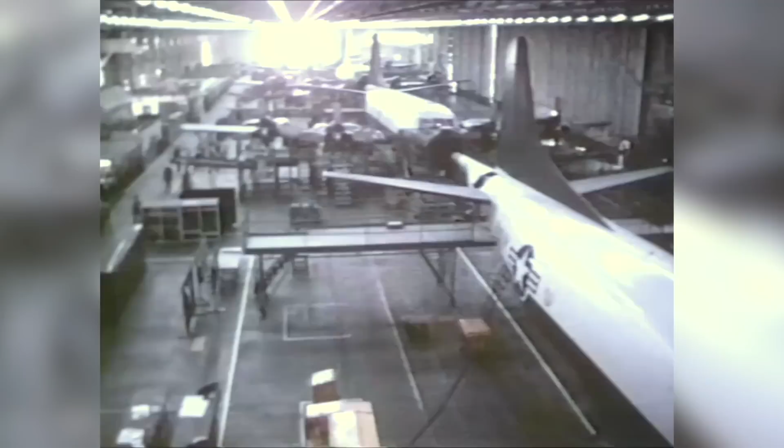As the transition from turboprop to pure jets came along, and the Electra line had served its purpose during that transition period, we had an airframe, a hull so to speak, that had many potentials. And we had a power plant that had obvious growth, and it became the Navy version of the L-188, known as the P-3 Orion, or the P-3 ASW aircraft.

Lockheed built more than 500 P-3s at Burbank before production was moved to other facilities. The Orion became the principal maritime patrol aircraft of a dozen nations.

At Burbank, new ideas led to additional designs that were built at other Lockheed facilities. The Skunk Works P-80 fighter evolved into a 2-seat trainer, the T-33. Over 5,000 were built at Palmdale for air forces worldwide.

In the 1950s, a need for a long-range, very high-altitude reconnaissance aircraft inspired Kelly Johnson and his team to design the U-2.

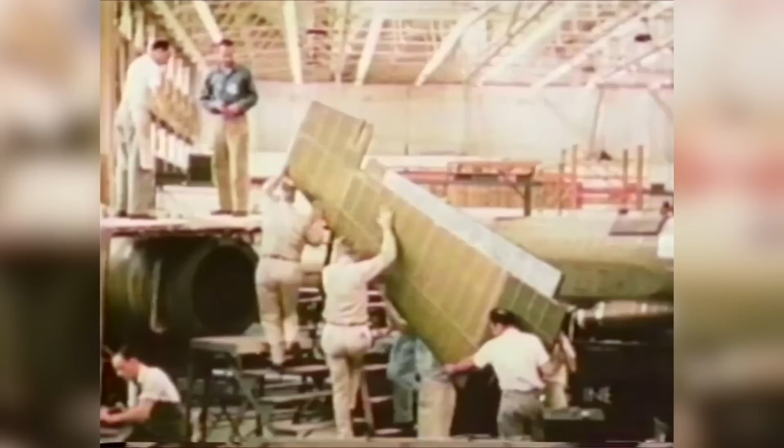There was an airplane that had to be able to go out of the range of then-known missiles, altitude-wise, and have a range, fuel consumption-wise, that was more extensive than even our long-range ASW-type airplanes that were designed for long range. So they came up with a unique airplane with a very slim glider-type, soaring glider-type wing, with a bicycle landing gear, a couple outriggers, a very reliable power plant, and a set of instrumentation that could sense and do a reconnaissance job that had never been done before.

Working closely with Johnson on the U-2 and later on other key programs was Ben Rich, who was to become head of the Skunk Works when Johnson retired.

America's first Mach 2 fighter also emerged from the Skunk Works in the 50s. Over 700 Starfighters were built at Palmdale, and 2,000 more were produced by foreign manufacturers. In Italy, production continued through the 1970s.

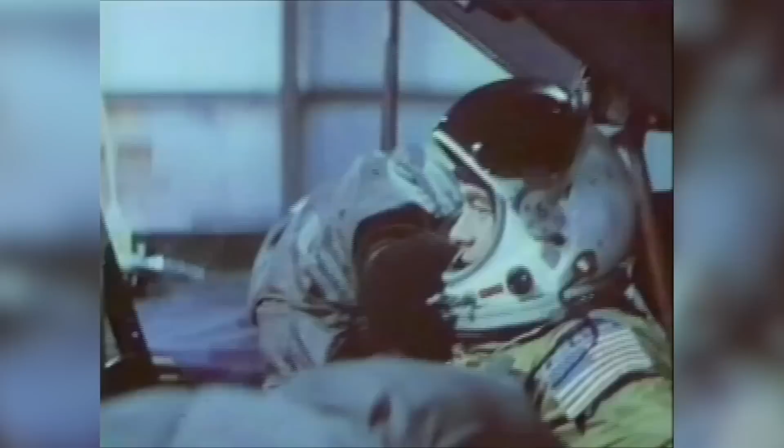In 26 years of service with the Air Force, SR-71s gathered reconnaissance data while flying over trouble spots at altitudes above 80,000 feet and speeds over 2,000 miles per hour.

The Blackbird set world records for speed and altitude that designer Kelly Johnson predicted would be long-lasting.

I think it'll be a long, long time before we have an airplane that has higher performance than the SR-71, because the need for it is not there in terms of the fact that we can have satellites circling the Earth in 90 minutes, and we do not have to go any faster than what we go with this one right here, and it'd be very, very expensive to go Mach 4 or faster. So we may be seeing here the highest speed military airplane that there will be around for a long time.

In 1969, Lockheed received a Navy contract to develop a new anti-submarine patrol aircraft that would operate from carriers. Production soon began at Burbank.

Coincident to the production of the P-3, and as a parallel and new development, came an onboard carrier type, a two-engine anti-submarine warfare airplane that had multiple missions even beyond the basic ASW, as a tanker, as a support aircraft for the fleet, which accompanied the carriers. That airplane is in operation today, and with modifications has been updated to concurrent requirements of the Navy, and will be known as the first ASW type Lockheed built carrier airplane.

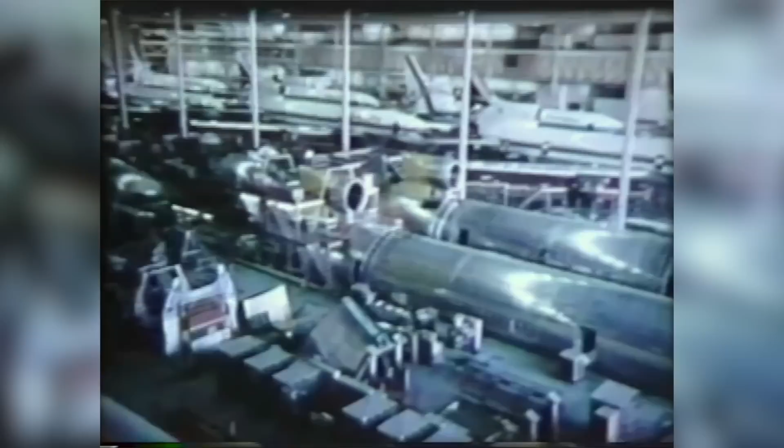In the 1970s, we came into the wide-bodied jet field with a high-capacity L-1011 TriStar, an airplane that was so far ahead of its competition design-wise and capability-wise that it became another hallmark of Lockheed achievement. It was fabricated and sub-assembled in Burbank. The assembly line and delivery operation was at Palmdale in a new facility built primarily for L-1011 production.

The airplane, even today, is in use in various parts of the world, and you hear of it having new duties to perform by new operators, new challenges, and it'll be around for a long time as a standard.

The last airplane Lockheed built at the Burbank plant was completed in 1990. It was an F-117A stealth fighter, produced in secrecy like many of its predecessors by the Skunk Works. This stealth fighter will be the very last complete, total design, fabricated, built, and assembled airplane on our Burbank property. It will have, for its lifetime, the signature of Ben Rich, endorsed by Kelly Johnson.

By a strange coincidence, the wingspan of that little F-117A stealth fighter is exactly the same wingspan as the original Lockheed Vega, 42 feet, harkening back to the genesis of Lockheed, the incubator days of the old plywood Vega. I'm sure Ben would acknowledge that the chain of development and the heritage of Lockheed has inspired him, as it has all of us, to continue to come forward with the best that Lockheed has to offer.

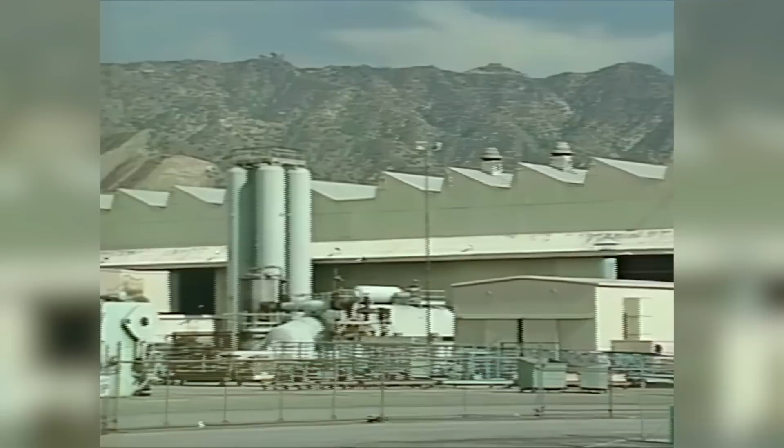Corporate headquarters moved from Burbank to a new location in 1986, and soon decisions would be made to vacate the once bustling manufacturing buildings as well.

Change goes beyond our changing product, beyond the changing of our facility requirements to keep up with technology. When we restructure our company to meet the changing times and the ambient conditions we work under—contractually, market-wise, and in our product lines—we must be sure that to survive as a viable company ready to take on new and yet unknown responsibilities, we will need to accept change as gracefully as we can, knowing that in some instances it could be a hardship. In other instances, and these are the ones I like to think about, they create new opportunities.

I'm reminded of a statement that fits with what's happening today in our restructuring of our company and our facilities. It's Robert Gross's statement. He said early on, when you work in the field of the air, you instinctively look up, not down. You instinctively look ahead, not back. You look ahead where the horizons are absolutely unlimited. And looking ahead is what we must do today, accepting change and the need to grow, taking advantage of the changing times and the opportunities they make available to us.